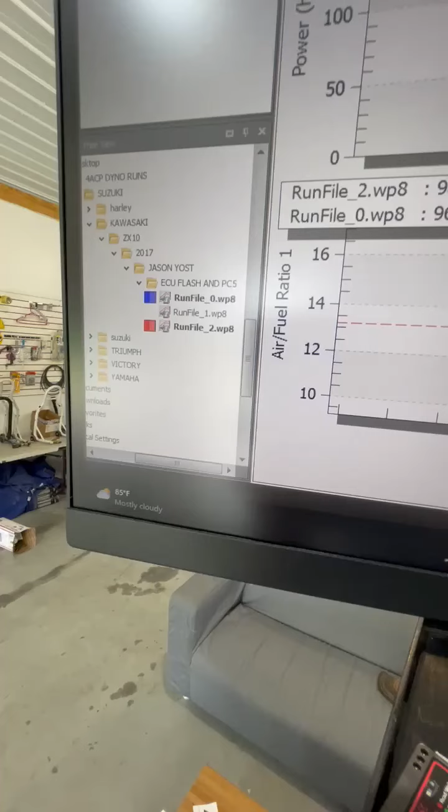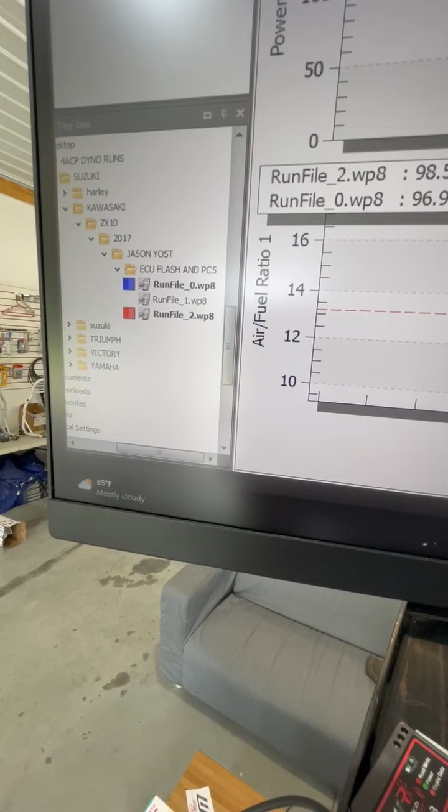Just wanted to go through and clarify some of the stuff on our chart because there were a few questions about it yesterday. So we're going to go through and clear that up for everyone who was wondering.

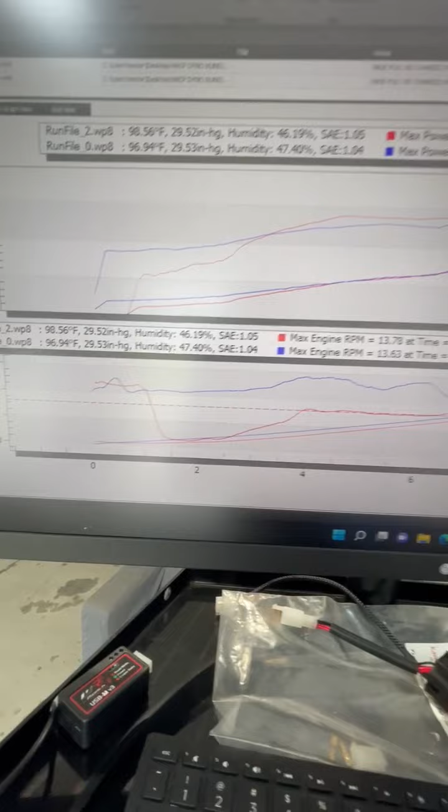So first of all, this is a 2017 ZX10, and we're going to show you our chart here with our air fuel from the 100% throttle position run.

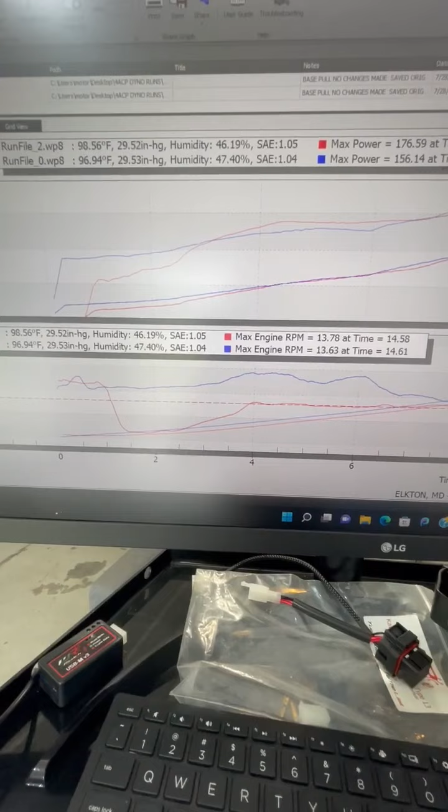This is before we started tuning on any of the partial throttles, which would be 80%, 60, 40, 20, and so on and so forth. So we start our runs early.

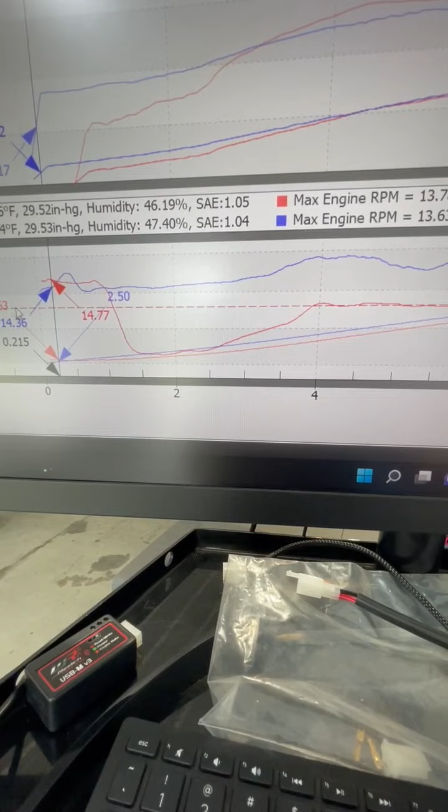So right here, this red and blue line, that's our RPM. If you go back and look at what it's pointing to, that's 2,500 right there and 2,600 right there. So we start our runs early. It's just how we do our dyno runs.

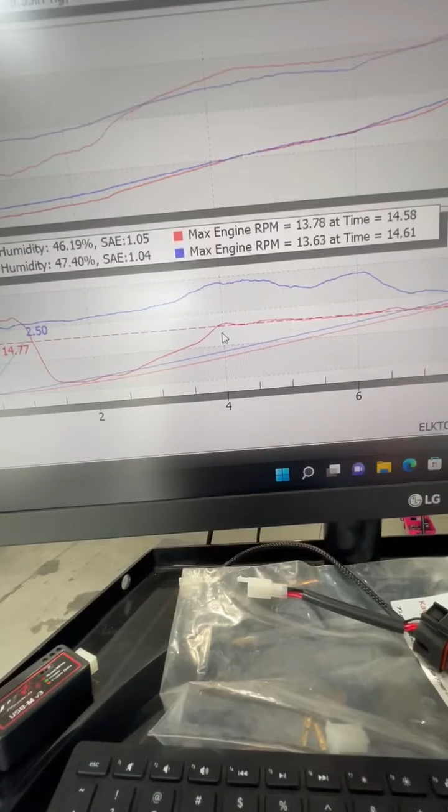So with this particular bike, it has an electronic throttle valve that does not open until 4,000 RPM. So anything below that 4,000, it's not 100% throttle. We can't tune it there. We can tune it, but in a different throttle position, which we'll get to later.

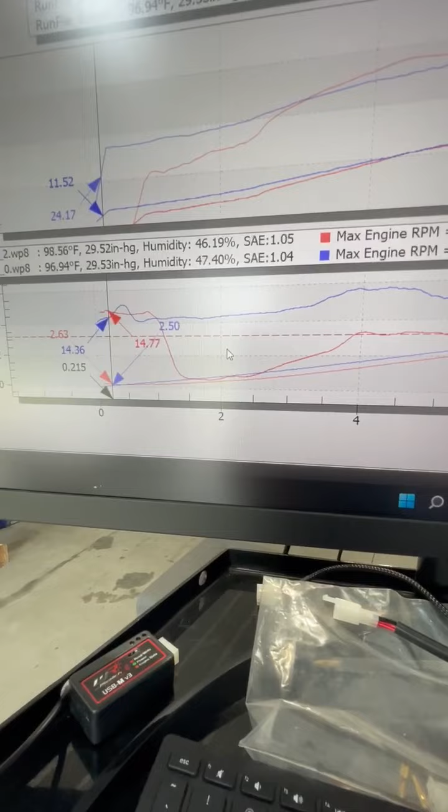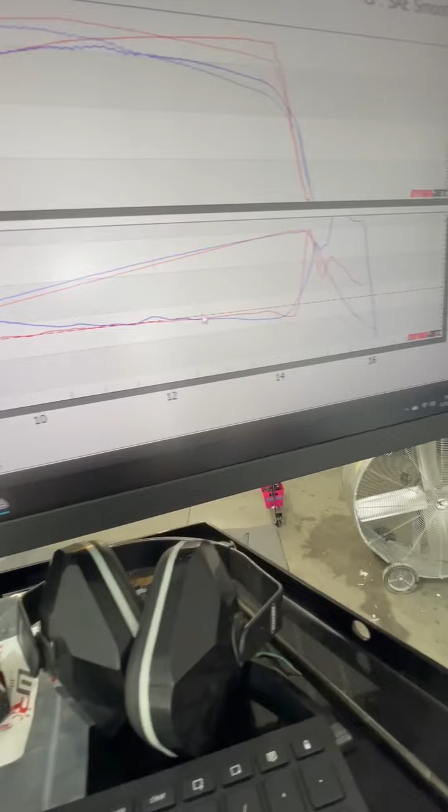So really, everything that's relevant is this line here. This red line follows straight down the air fuel all the way through, and we have good air fuel the whole way. We run a little rich on the top end, but that's perfectly within range. Target is 13.0.

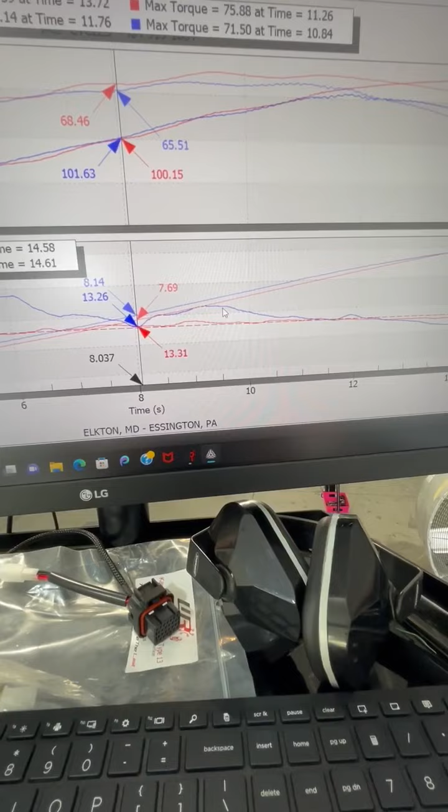So the blue line here was before our tuning. It was extremely lean, went about normal around 8,000 RPM, lean again, about normal in the top end, and a little bit rich on the top end.

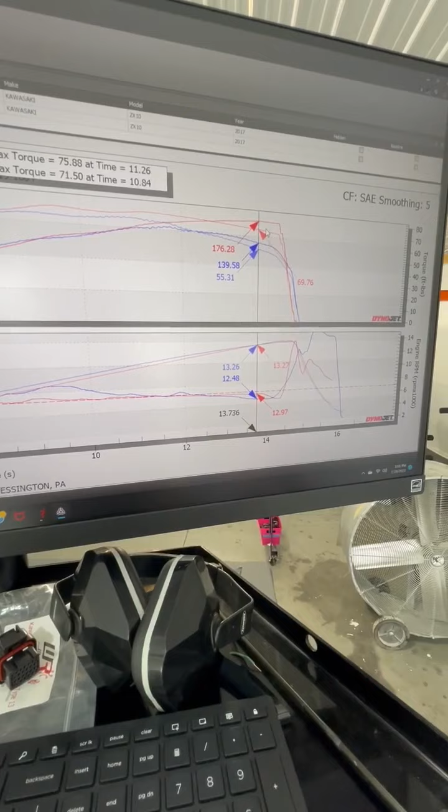Also, we want to show you here, our total horsepower gain is about 37 horsepower. So we're going to look at 176.59 at the time mark of 13.7 — not RPM, just the time mark.

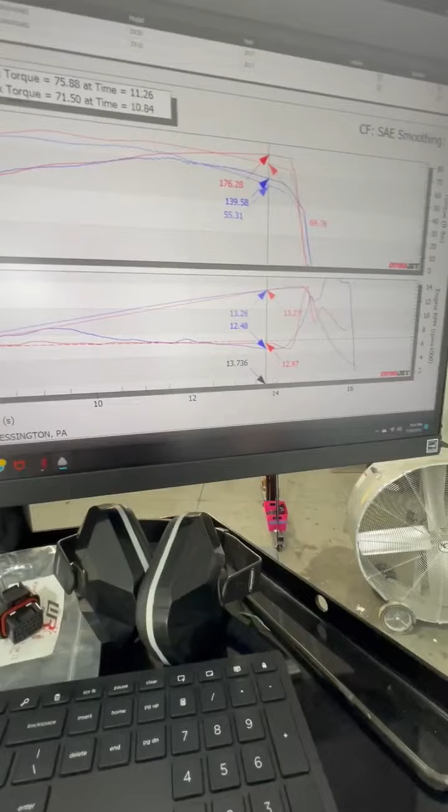So we're about there, at 13.7 we're at 176. Prior to that, before the ECU flash, we were at 139. So we gained about 37 horsepower.

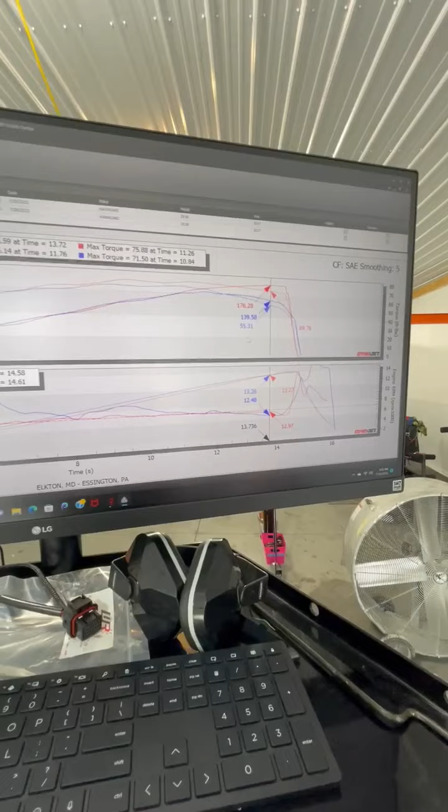So now we're going to go over and look at the stock ECU before anything is done. Let's open that up.

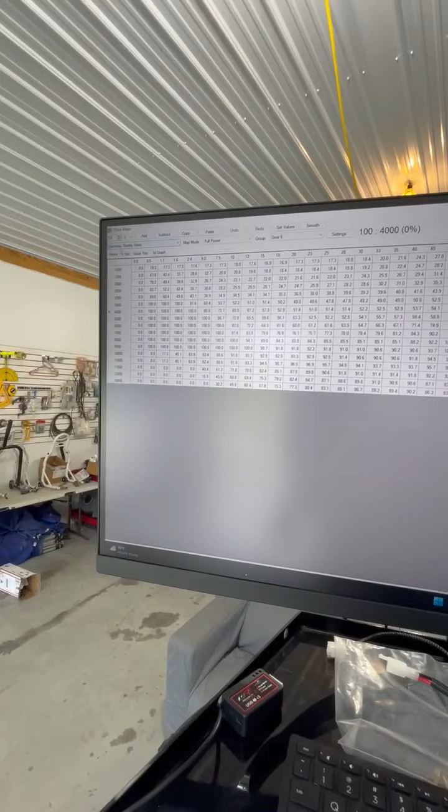Okay, so here is what we do in our Woolich software. Our electronic throttle valve — full power mode, gear 6 — this is what happens. So in your upper RPMs, it shuts down on you.

It's only 100% open between 9,000 and 11,000. You do get 100%, then it shuts down on you.

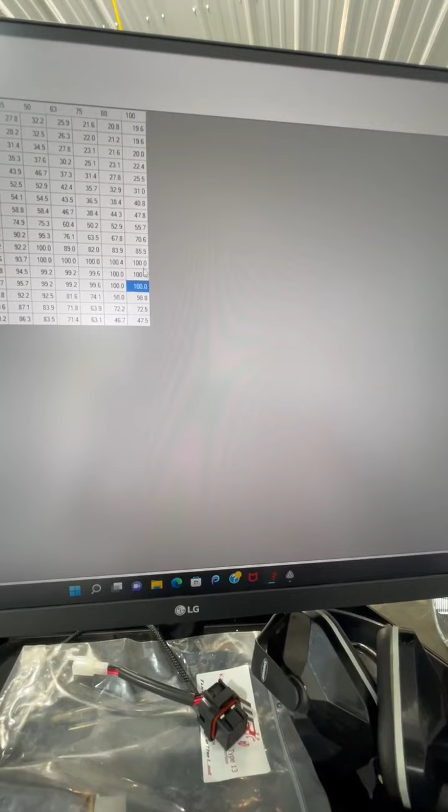In the earlier RPMs, for example at 4,000, it's only 40% open. So when you're at 100% with your hand, the throttle valve is only 40% open.

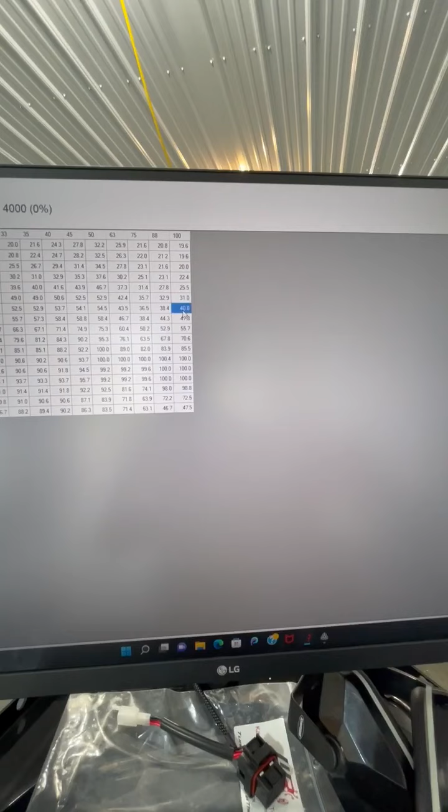Now, of course, we adjust and tune all this to achieve our full horsepower and full torque, and then we tune the fuel accordingly. We're not going to show you our map because that's top secret.

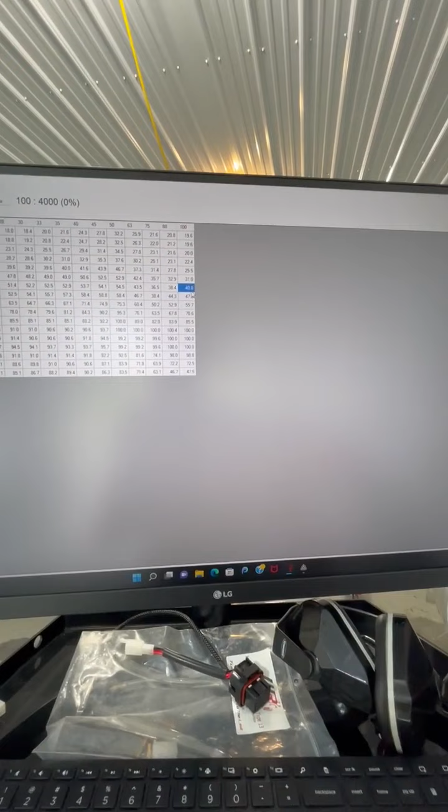But everything in here, we do adjust for our electronic throttle valve, and anything below that 4,000 mark, we don't put it to 100%. So that's why there's not proper fueling at that position.

The bike runs fine. It's 100% tuned at all throttle positions, and it has great gains in horsepower and torque.

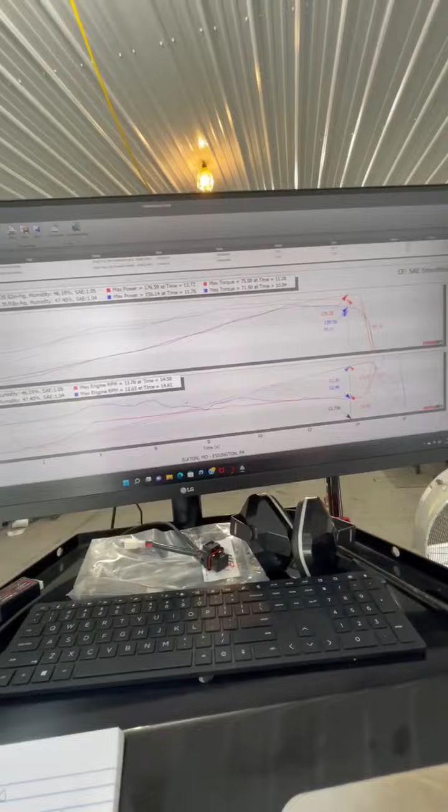So now that you can see that, and you can see what we actually gained in horsepower on the top end, and our air fuel is perfect, there's no discrepancies in what we do as far as tuning the bikes. We've been doing this a long time — ECU flashing and tuning. So there's our horsepower gains.

RPM starts at 2,500. This little section here gets tuned later — we didn't tune that yet.